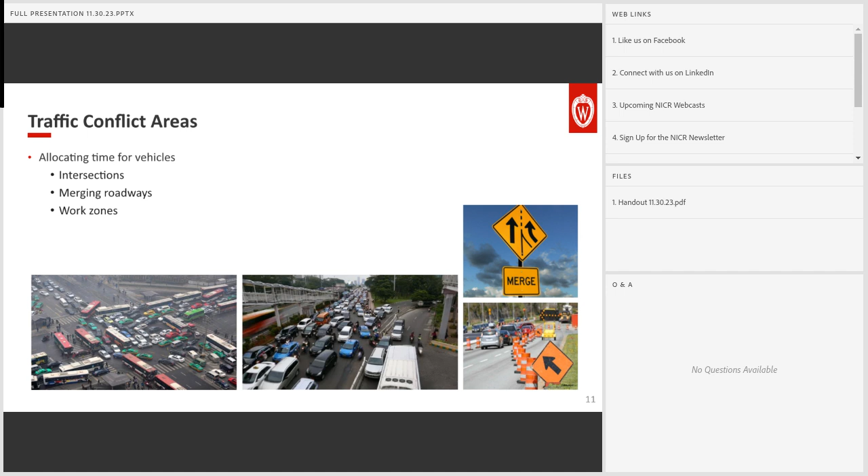So eventually, we're dealing with infrastructure facilities where vehicles from different approaches have conflicts, and we have to schedule them to certain kind of alternating rights of way over time and have the vehicles pass or traverse these conflict points in an optimal manner. So what are the issues that we may face in such vehicle scheduling problems? When these conflict points are not very efficient, that means the schedules or sequences of these vehicles passing the conflict points are not optimal.

You can consider all these different facilities like stop sign, yield, intersection, and signal timing. You have so many different alternatives and parameters to control, and if you are not designing them properly, then the intersection may not have a good capacity, and they may not give the proper priority to transit. On the other hand, we may also be concerned with fuel consumption, energy, and emissions. That is related to the stop and go pattern of these conflict points. For example, at signalized intersections, you have to stop some approaches to let other approaches go, which will inevitably form stop and go traffic patterns, bringing excessive fuel consumption and

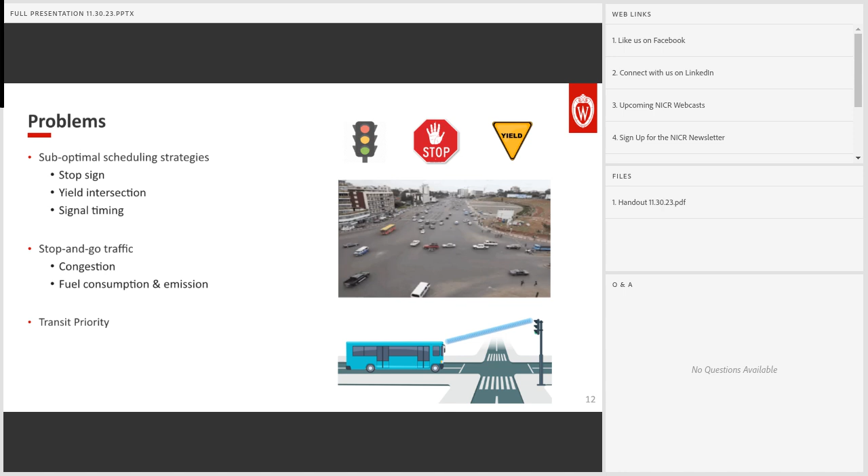So the problems we're going to investigate are in a relatively high-tech scenario with connected and automated vehicles. So in this scenario, all the vehicles are connected and automated so that you have full control of the system.

And I think you have already seen the animation here that is a fun version of what happens in the future if the vehicles are all automated. And it's a little bit exaggerated since you see people walk across them. I would not dare to walk across an intersection like that.

But if you take away the pedestrians, if we can really nicely arrange the vehicles in this manner and have them perfectly scheduled so that they do not need to stop at the intersection, that will give the maximum mobility and minimum environmental impact, as well as good assurance of safety.

And so in these kinds of problems, when vehicles are all controllable and you can give them a slot of time to pass the intersection, we're going to investigate how to treat transit, and basically we just view it as a vehicle with a higher weight compared to other vehicles,

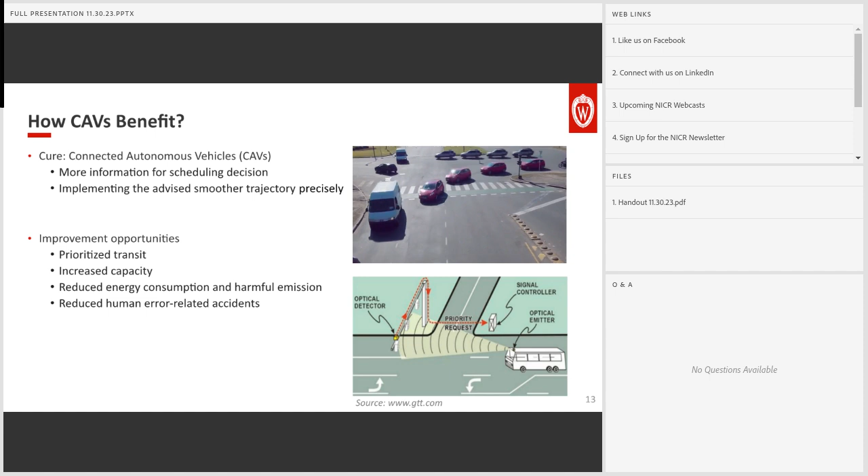So we have been looking into the methodological literature of relevant problems, particularly pertaining to vehicle scheduling. There are decentralized approaches and centralized approaches, and many relevant studies and developments. And the gap we identified is there is no CAV-based centralized optimization problem that coordinates vehicles at a general conflict point with heterogeneous time values and headways.

So when we say heterogeneous time values, it's because transit would have a much higher ridership than a passenger car, and that way, the cost of delay to a transit would be multiple times more than that of a passenger car, for example, maybe proportional to their riderships.

Note that this is a relatively ideal scenario setting where we have full information. We know all the riderships of all these vehicles and we know all these weights. The assumptions might be strong, but as a first study that shows you the potential of the system, if we get all the information ready, that is still possible if we continue to enhance our infrastructure and sensing facilities and devices,

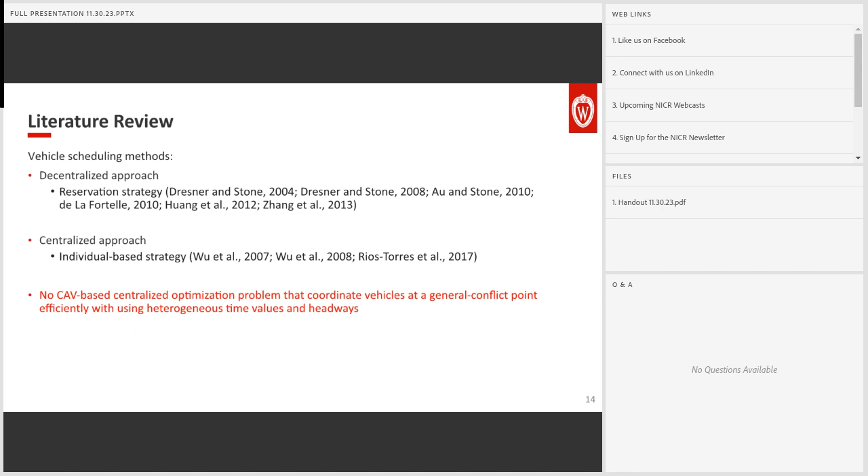including connected vehicles and automated vehicle capabilities, and we will be there. So we think this study is still meaningful. And also we have rigorous and general model formulations that can be adapted for all kinds of different applications, including transit priority, but not limited to that.

So for the problem description, we consider a general conflict area that could have different approaches, more than two approaches, could be three or four. They have to pass a traffic conflict point. Because you have multiple approaches, you have to give each approach a certain time slot to have them pass.

All right, so it's a generalization of the conflict points we've seen, like signalized intersections. It's like you have signals to allocate the time slots to different approaches, or a stop sign that means first come, first served, or a yield sign that means certain approaches have priority over other approaches.

And then the overall problem is, suppose you're given all these vehicles and where they are. That's what you have here. And you want to devise a sequence for these vehicles to pass the traffic conflict point based on the characteristics of the intersection. In this case, we would assume this is a signalized intersection where we have control of which approach passes this traffic conflict point.

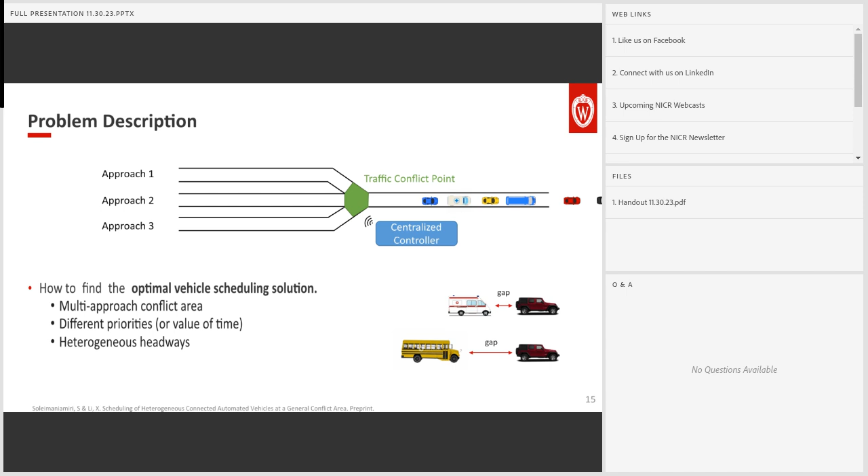Okay, so we assume the system is a fully connected environment. All these vehicles.

All these vehicles and information in real time, and their history. And overtaking from one approach is not allowed, so maybe one approach is just a single lane. And extremely congested traffic is not considered. We consider moderately congested traffic where CAVs travel within the control areas at a free flow speed.

So no queue; it's not too much oversaturated. So you can still have the vehicles pass the intersections without excessive queuing. And we want to maximize traffic throughput at the conflict area. All these vehicles are connected and automated, so they're CAVs. So all CAVs pass the conflict area with free flow speed.

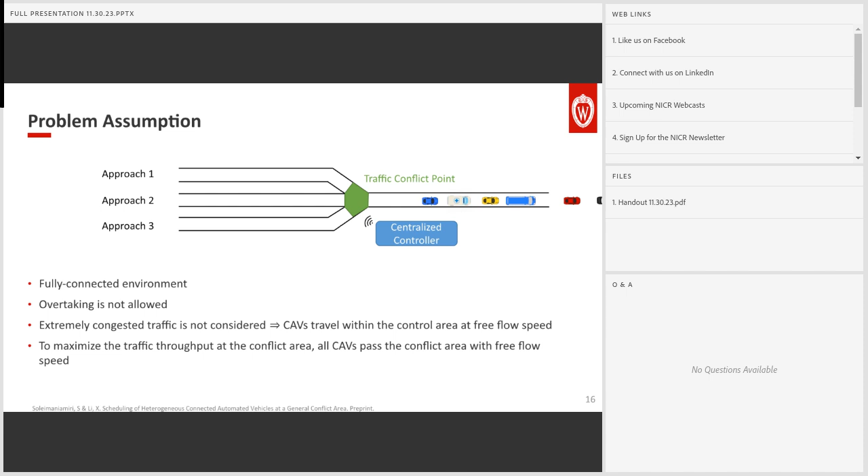So that's the essence of the non-stop intersection design. We can control these vehicles properly to have them accelerate and pass the intersection at high speed to improve its efficiency. So here's a model formulation. I don't want to talk too much about the math, but I just want to give you some flavor. So the objective is to minimize the delay cost of all vehicles.

And you may ask, this is transit priority, so why do you want to minimize the delay cost for all vehicles? I would say transit priority is, in general, a trade-off between transit delay and other vehicles' delay. Let's say we do not need to give the transit absolute priority in all circumstances. You have to balance the delays between transit and other vehicles.

For example, if you have a transit vehicle that has 20 passengers on it, of course 1 second delay of that transit is worth 20 seconds delay to a passenger vehicle with only one rider. But at the same time, if that transit only has 3 riders on it, and you're giving the transit priority, but the cost is you're going to delay the conflicting approaches' vehicles by an extra 100 seconds.

Let's say you gain 2 seconds of priority for your transit with 3 passengers, but you're going to lose like 100 seconds for all the other road users. It might not be the best decision. So instead of viewing transit or a particular mode separately and giving it absolute privilege, in the ideal connected automated vehicle environment, we just want to give them a weight.

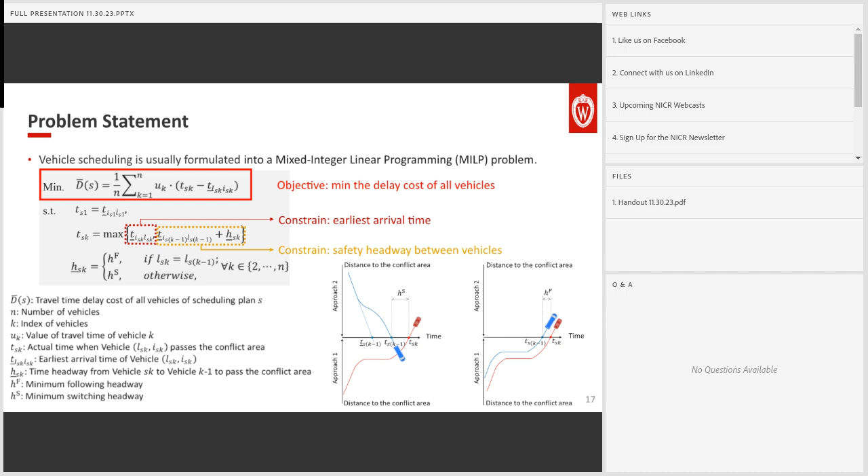So overall, your optimization decides the vehicle sequences, which approaches need to pass first, so that you can minimize the overall system delay weighted by the vehicles' priorities. So now we have the formulation, and we want to look into the solution algorithms. And because this is real-time operation, the solution algorithm's efficiency is also relevant.

So, if you're just looking at the formulation, it's a very complicated scheduling problem. Scheduling is in general an NP-hard problem, so solution time could increase exponentially as the problem scale increases. So we came up with some customized algorithms to expedite the solution time. And we also have some heuristic methods to approximate the optimal solution to get a near-optimal solution in almost no time.

And also we want to reduce the problem size by platooning the vehicles together, basically clustering the vehicles into platoons, so into longer vehicles, so we have fewer vehicles. The first solution, coming up with the corresponding algorithms to expedite the solution approach, would be the year 1 project, and reducing the problem size the year 2 project. I'm going to explain these two years of project outcomes, particularly the algorithms, in the following slides.

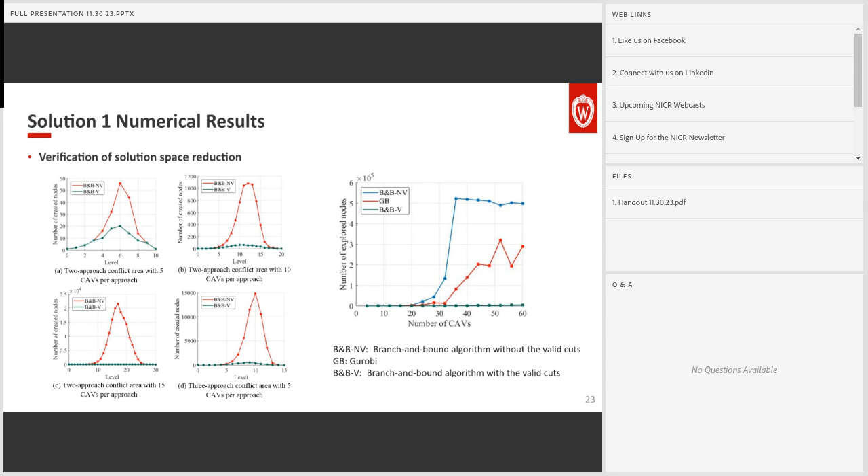And on the right, we compared all these three methods, and we see that branch and bound plus valid cuts, that is the dotted line at the bottom, explores a much lower number of nodes compared to other methods. That probably indicates our method has the best efficiency.

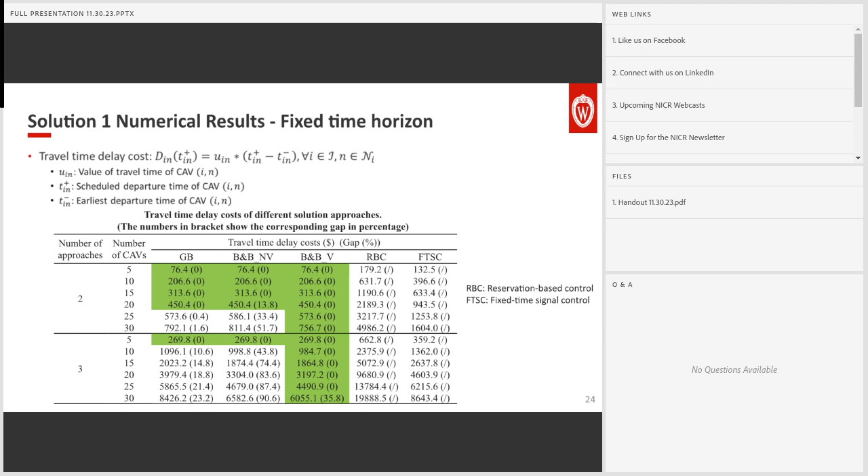And we conducted some numerical examples and we show the results. Here are the solution costs and also the gaps. And we see our branch and bound with the valid cut, B and B-V, has the minimum solution cost and the minimum optimality gap. That means that our method works well.

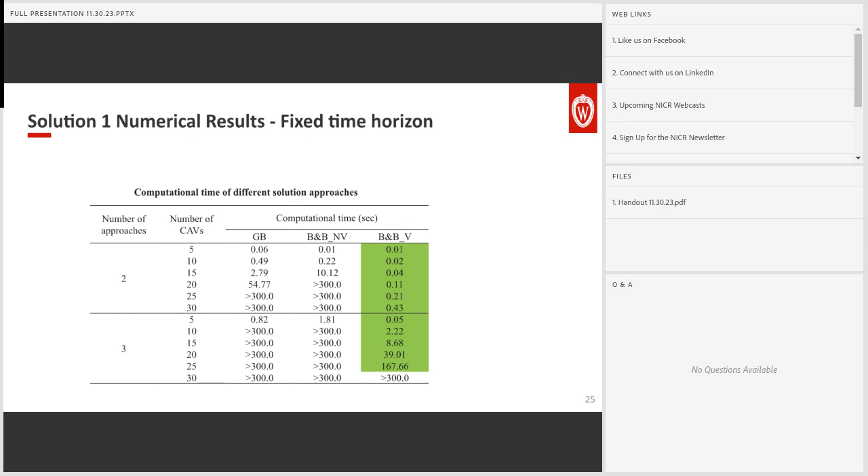And in terms of computational time, for two approaches, our method is always less than 0.5 seconds. For three approaches, it may increase as the number of vehicles increases. It can get to 167 seconds, which may not be feasible for real-time applications, and there is still some room to improve the algorithm, but at least it much outperforms the other methods that are available off the shelf. Compare with the second column, the branch and bound without valid cut. So this is a really good solution.

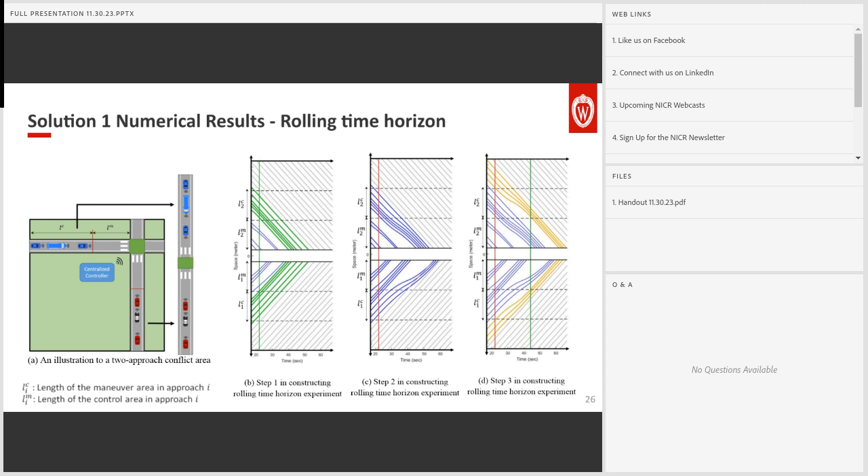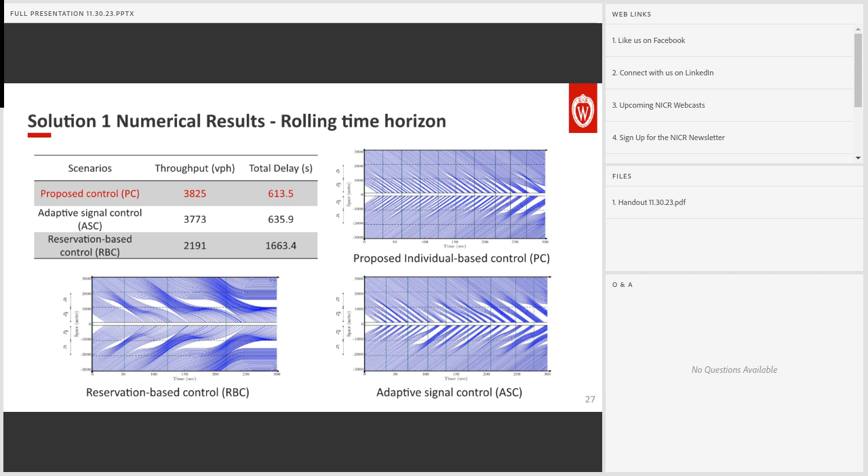And then we have reservation-based control. It's more like vehicle first-arrive, first-served. That is shown in the lower left figure. And then we have adaptive signal control. So we use a classic adaptive signal timing method to control the vehicles. This is ASC, and we compare the throughput and total delay, and we found that the proposed control has the best total performance.

So for this solution 1, the conclusion is it's a new and efficient vehicle scheduling model considering transit priority. And we see the branch and bound with valid cuts actually beats all other solutions. And individual-based vehicle scheduling results in less total delay and fuel consumption compared to reservation-based vehicle scheduling. We didn't show fuel consumption, but because of the vehicle trajectory smoothing, we did have less fuel consumption.

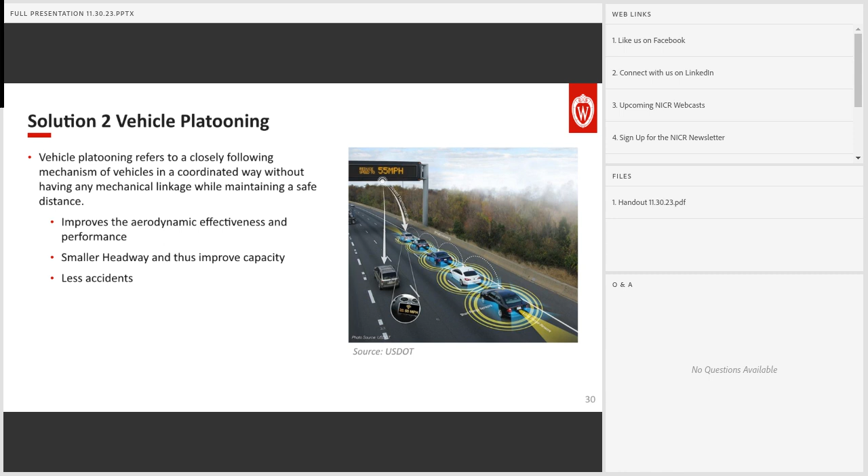Okay, now I'm going to quickly go through the year 1 solution 2, that is how to reduce the problem size. So this is inspired by the concept of platooning. Vehicle platooning refers to a closely following mechanism of vehicles in a coordinated way without having a mechanical linkage while maintaining a safe distance. So it has lots of advantages, like improved aerodynamics, smaller headway, higher capacity, and fewer accidents.

And also we can put the transit priority in the context of platooning, sort of combine the transit vehicles with the other vehicles as a platoon, so we can handle them as one vehicle. And this is going to result in enhanced performance for public transit, and we can optimize the priority for transit vehicles in the same manner, just like we assign an appropriate weight.

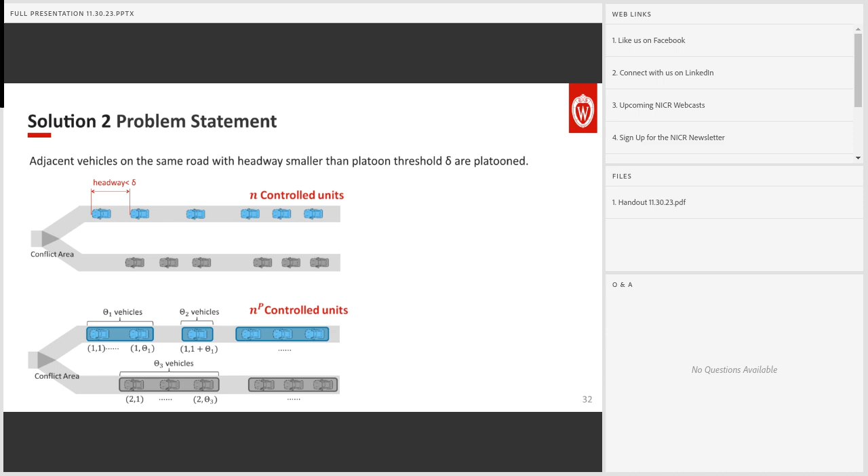But instead, if you group them into different platoons like theta 1, theta 2, theta 3, and so on and so forth, you're only going to have like 5. So vehicles close to each other can be grouped in one platoon. That means they need to be synchronized and they move together, right? You're basically combining shorter vehicles into longer vehicles, or reducing the number of vehicles in this control, and that's going to much reduce the problem size and improve the solution efficiency.

Okay, so initially you may have like n controlled vehicles, but as you do some certain kind of platooning, let's say if the headway is less than the threshold, you platoon them together, you're going to have much fewer vehicles, pushing this n in the graph to n P, and that is going to much reduce the computation time for scheduling the problem because you have fewer units to schedule.

We want to compare the solution of the reduced problem and the original problem. So again, our problem is to decide the optimal passing sequences of the vehicles, right? For the original problem, we're going to use script S to define the set of all possible passing sequences of vehicles. And after you consolidate the vehicles using platooning, you're going to use script S superscript P to show the set of all possible passing sequences when the platoon rule is applied.

All right. And from that, you can find the optimal solution S star. That is for the original sequence. That's going to be the best sequence. And also you have the platoon optimal solution. That is the optimal solution given the vehicles are platooned in this way. You cannot separate the vehicles that are close to each other, right?

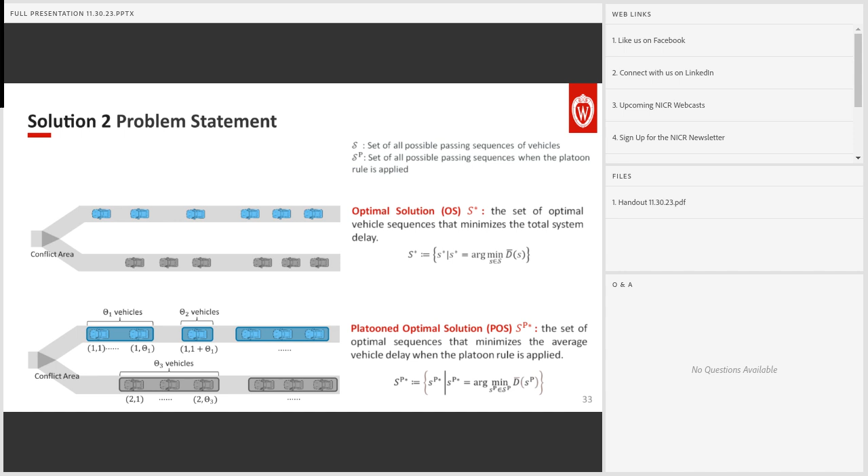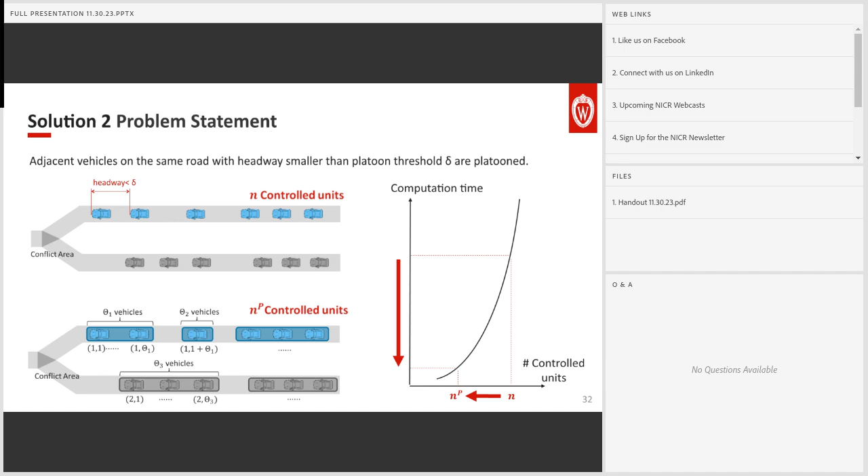We do some analysis, and we look into the upper limit of the gap, and we changed the values, so in this figure we show the gaps across two variables. The x-axis variable is delta. That is a platooning threshold. For example, the threshold is here, the headway between these two vehicles. If you look at every pair of vehicles, if the headway is less than delta, you can platoon them together.

That's one variable, the x-axis, and also the platoon size, where you limit the longest platoon size, right? And you can see the lower right corner of this graph has relatively large gap values, and that means higher threshold delta and lower platooning size. So the case showed that we should avoid a small platoon size and a large platoon threshold, which leads to a great gap. This can be simplified as a guide to vehicle platooning.

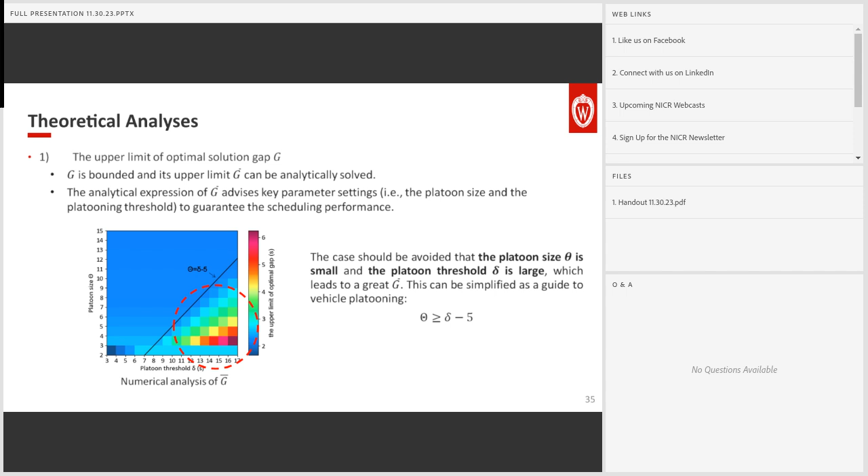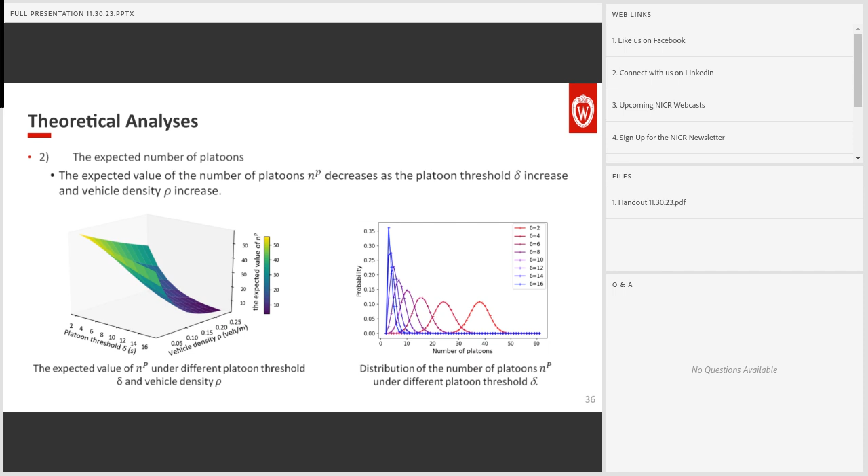So we want to have theta greater than or equal to delta minus 5. We want to have the platoon size large in relation to the delta, the platoon headway threshold. So we also look into the expected number of platoons over vehicle density and platoon threshold, and we look into their patterns. And eventually we came up with some criteria.

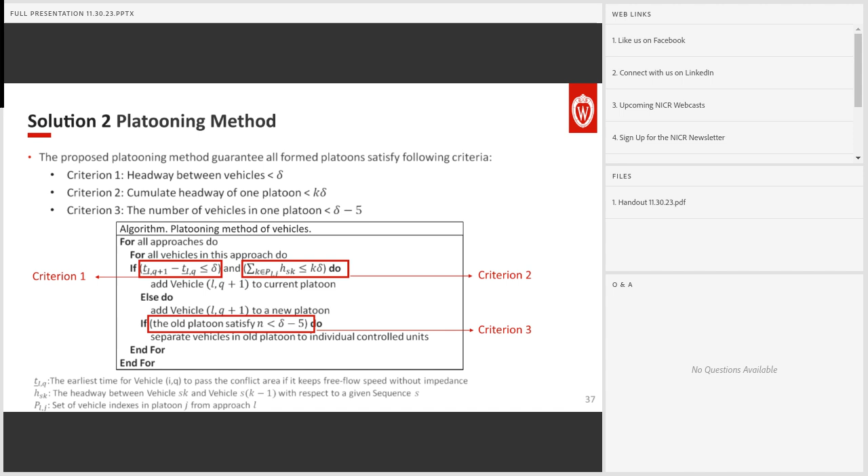The first criterion is just that the headway between the vehicles is less than delta. And we also added some other criteria, like the cumulative headway of one platoon is less than k times delta. K is the parameter. And the number of vehicles in one platoon is less than delta minus 5. So basically we have all these criteria and we can apply them.

And we come up with 3 different scenarios of the solutions. The first is no platooning. That is the original solution we obtained from solution 1. The second is critical headway platooning. We only use the first criterion to platoon. We just platoon all vehicles that have a headway less than delta altogether, regardless of the length, cumulative headway, or the number of vehicles in one platoon. The third is PP, the proposed platooning method, that uses platooning including all these criteria 1, 2, 3.

And here are some of the results. The figure on the left is the number of platoons versus the platoon threshold. And you can see that as the platoon threshold increases, both CHP and PP much reduce the number of platoons. That's going to much reduce the problem size.

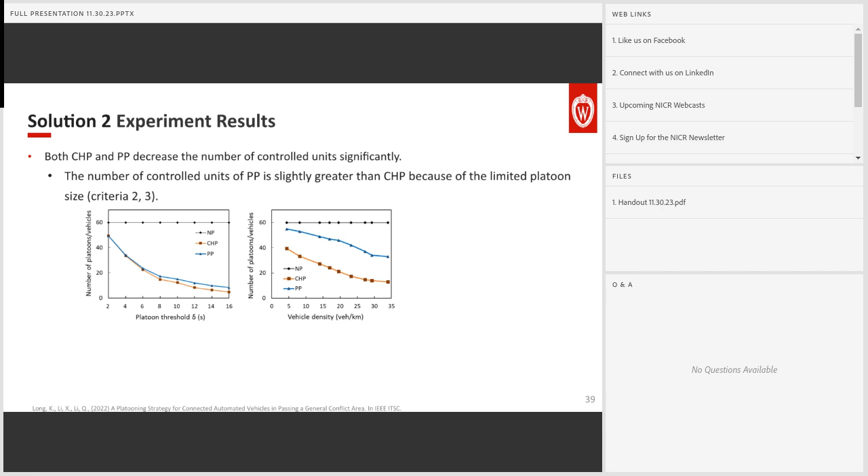On the right is vehicle density over number of platoons. Of course, the higher the vehicle density, the fewer platoons you're going to have, because vehicles will be likely to platoon together. And we see that CHP has the lowest number of platoons. PP here still has significant reductions, but not as much as CHP, because you have other criteria. You may not have excessively long platoons, but it has an advantage.

Now we look into the average vehicle delay, and we see that the PP is close to the NP, which is actually the delay we want to have, right? NP is actually the black curve in the bottom, and we see when the threshold delta value is low, actually across all vehicle densities, the proposed method, that is the blue curve, is relatively close to the NP, which is the optimal value, right?

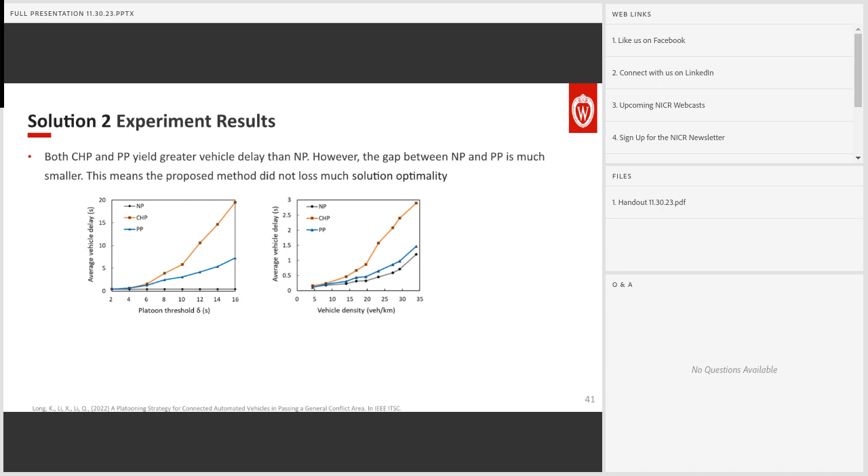That means the proposed method, although it slightly sacrifices computational time compared to CHP, improves the problem solution optimality. The solution of PP is closer to the NP solution, that is the original solution value without platooning.

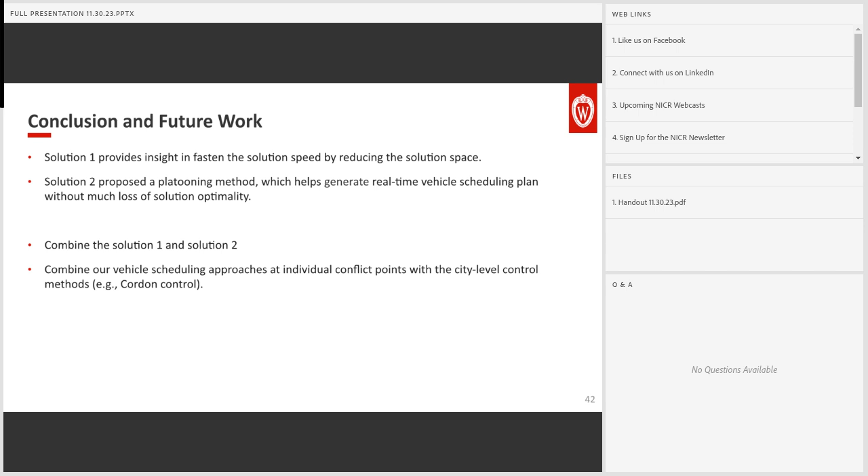So the conclusion is, on top of solution 1, solution 2 proposed the platooning method, which helps generate a real-time vehicle scheduling plan without much loss of solution optimality. We can combine solutions 1 and 2 and combine our vehicle scheduling approaches at individual conflict points with city-level control methods. For example, in the third year, what we're going to look into is cordon control.

So this is the current work, actually. I would say ongoing work instead of future work. Basically, instead of just looking at one facility, one conflict point, we look into an urban area, and we have cordon metering rules for present day and future cities.

We build a model to calculate the total travel cost of the urban road networks, emphasizing transit priority. The total travel cost consists of two parts, namely energy consumption and delay, with adjustments favoring public transit vehicles based on the scheme that we developed.

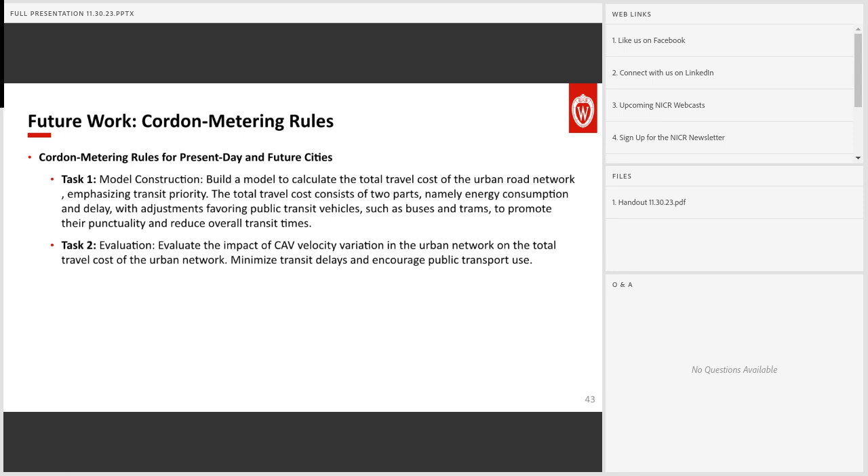And task two is evaluation, to evaluate the impact of CAV velocity variations in the urban network on the total travel costs of the urban networks, because we may have the flexibility to adjust the CAV velocity based on the overall urban network conditions. This is to minimize transit delays as well as encourage public transportation use.

So here is the list of the work that we need to do for the cordon metering rules. That is what we're working on. In task one, we're going to build the road network into cells so we can take advantage of cell transmission models. We're going to study the spatiotemporal evolution of vehicles and the impact of changes in CAV speed on the spatiotemporal evolution, and look into the impact of changes in CAV speeds on energy consumption and the mobility of cities' roadway networks.

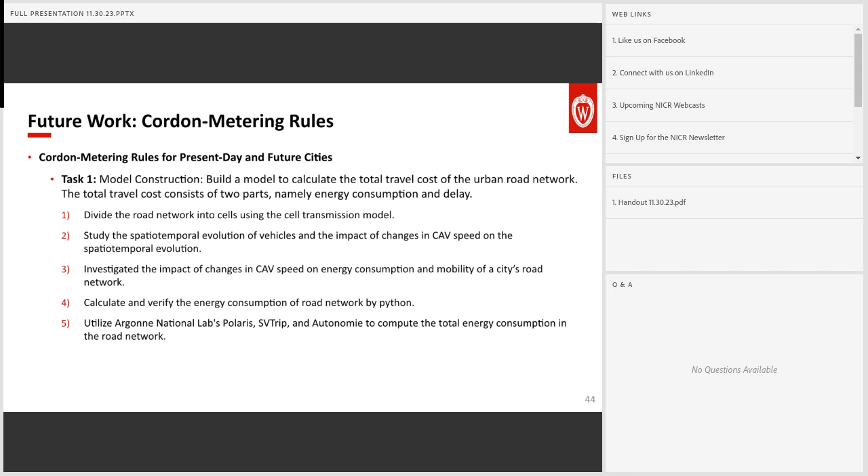And so we're in the middle of this project, and we hope to share more results with you next year.